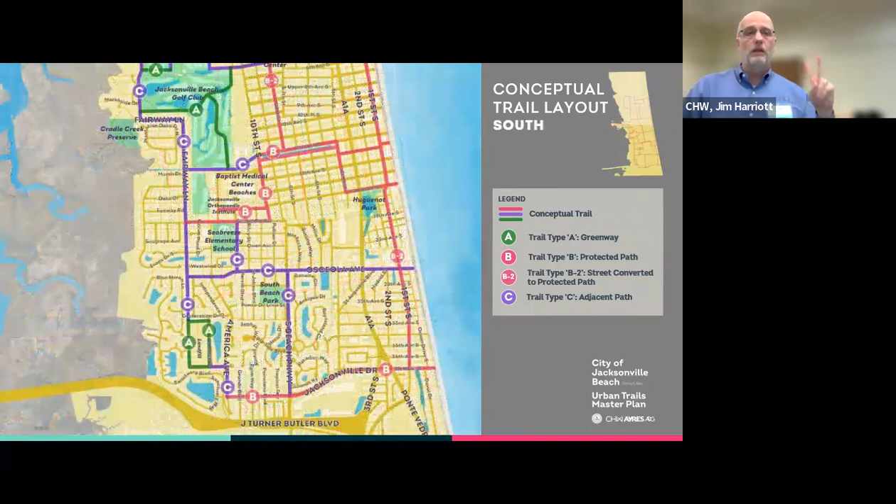So let me jump to the south map. You see the A's. The A-type route is a Greenway. This is one of the biggest challenges we see, true Greenway trails where you're completely void of vehicles is really difficult. There's a lot of roads and streets, and it wasn't planned for that. You don't have the benefit of two or three railroad corridors running through the middle of your city that you can acquire and convert.

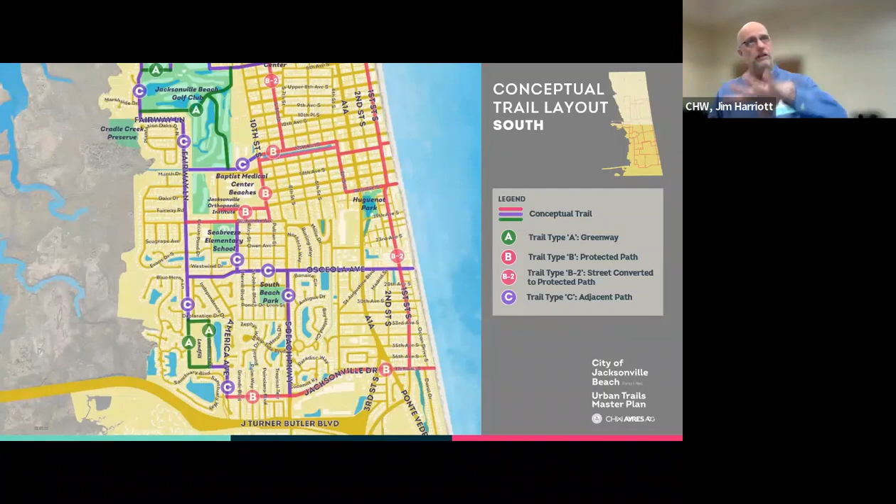But there are some areas that stand out. One is the golf course up here, and we've talked to the city, Parks and Rec, and the golf course people, and they are open to running trails through the golf course. So we've done a lot of background research on other communities that have done this. As a golfer, I was kind of surprised, because there are golf balls flying around golf courses, and there are communities that have dealt with it in different ways.

Some communities have just said, you know what, you're out there, you raise your hand and head out, we'll be gone in a few minutes. Other communities have put nets up. So we're kind of working on that. The concepts you see for routes through the golf course are in concept only right now. We've mapped out the holes, we've got a picture of that, and we'll start laying those out to see if there's any ability to move people in around the golf course.

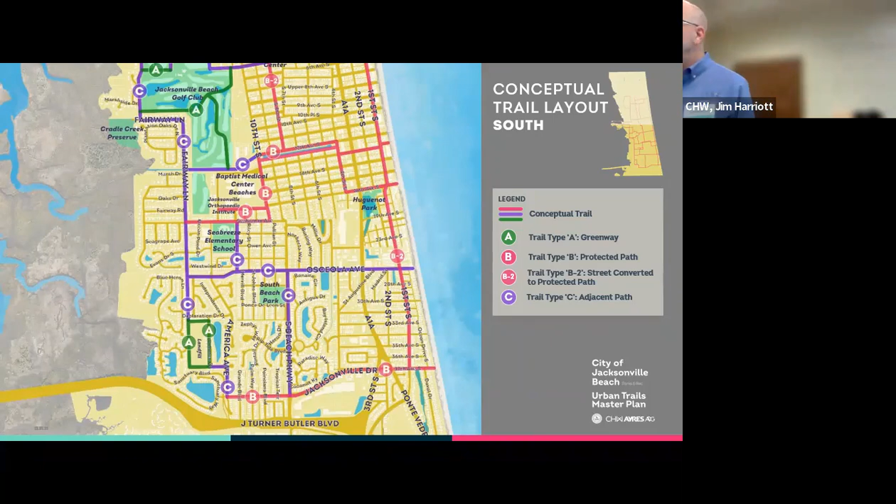The other area is at the south end of the city. This A and this loop here is an old landfill that sits out there. It has a Greenway route that could reach up into the north from the landfill up into the neighborhoods to connect those. It's kind of a unique area. I was out there again tonight taking a look at ways it could be connected. So those are two areas that stand out.

The B route is a separated corridor where you're separated from traffic, reasonably safe. The C routes, the corridors, are just a little bit tighter and you're closer to the travel lanes, but still separated. So let's go ahead and take a look at some of those.

These cross sections — the Greenway cross section here is the type of atmosphere you're trying to create in these two areas, separated. We think we can accomplish that on the areas on the map marked A: more nature exposure, a route that might be transportation related where you're using it to go somewhere, might provide access to neighborhoods, but definitely a safe riding environment. You'd be completely safe in whatever modes moving through the corridor. We've called it type A and defined it as a Greenway.

Type B routes are a protected path, where the goal is to move the path as far away from the right of way as possible. On the actual diagrams of the cross sections we drew up, it says 'varies' — I'd say you want to get 10 feet or more, and there are some rights-of-way in the city where we could accomplish that.

There are other trail types we're working on. Everyone's probably looking at the map and asking what we're going to do on First Avenue, because that's one that's banging around in our minds. We've come up with some cross sections—Cody's worked on some, and I've fiddled around with some—and it all keeps leading us back to needing to talk to the community and stakeholders more about how we can handle that. There's so much pedestrian activity and traffic around those areas. How do we create a safe environment? We have ideas that would be really cool, but they're big ideas we want to discuss with the stakeholders first.

For example, creating a one-way street on First, or eliminating traffic completely and going with a pedestrian-type street. I didn't put a pedestrian street cross section in here, but if you've ever been to Asheville, North Carolina, there's a little street called Wall Street—you can Google it, it's pretty cool. Lemon Avenue in Sarasota is another one. Basically, from storefront to storefront you have the same cross section elements: sidewalk, street, sidewalk, storefronts on either side. But where you'd have curb and gutter, you take that out and create trench drains so it's all one surface level, door to door. As long as you keep pedestrian and bicyclist activity up, you can still allow cars to go down there.

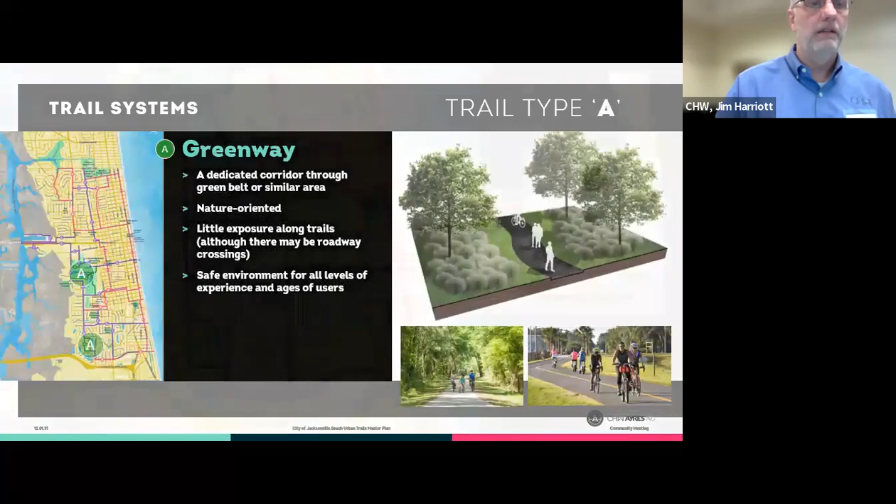On 10th in this area, we come down on the north map. We come down 10th all the way down to the bottom here, and then we jump over to 8th. And you probably wonder why - it's because of less driveway interaction.

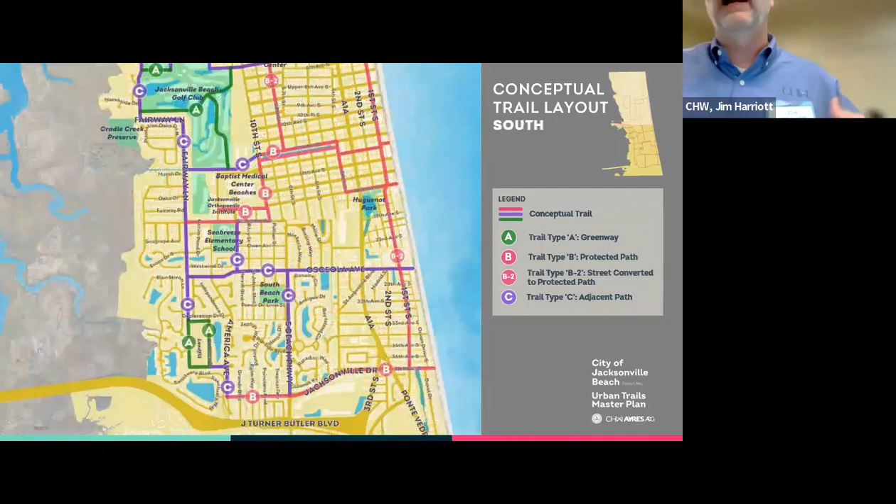If we stayed on 10th, it turns into an industrial area south of Beach Boulevard. There's a wide right of way, but there are driveways everywhere - people are parked everywhere. We just didn't think it was ever going to be a viable part of the network if it was something done early on in the project. So a lot of those answers as to how do you impact or cross driveways become site specific when we get out there, but we are looking at them from a planning standpoint.

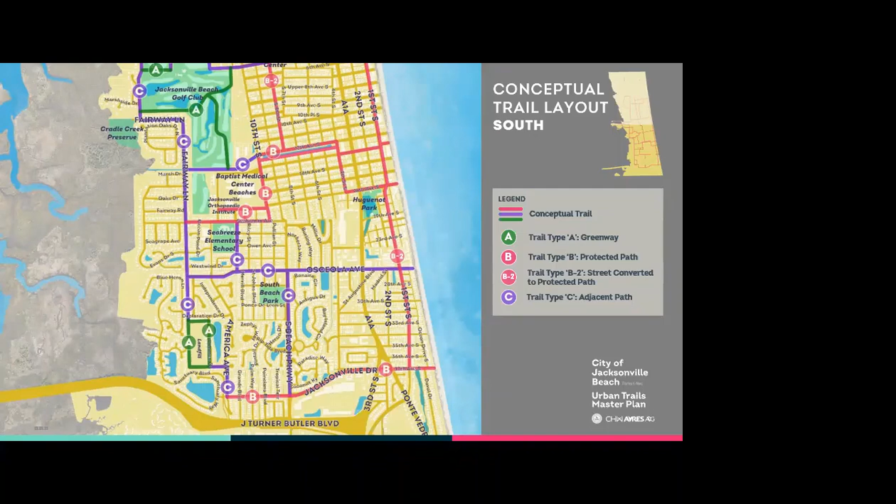Trail type Greenway - so Jacksonville Beach Golf Course, A, B, protected path, trail type B2, separated. Here's the pier, and it goes through here to Penman. Trail type C, adjacent path. Well, this is coming right down to us.

Protected path. Right here? Adjacent.

So for those on the Zoom meeting, there were two question points. One was the very south end of Penman - is that correct? As it approaches Beach, is to close that gap and find a way across Beach Boulevard. And then as an alternative to running along Beach Boulevard, which is probably a very tight right of way, look at Shetter as a corridor, correct?

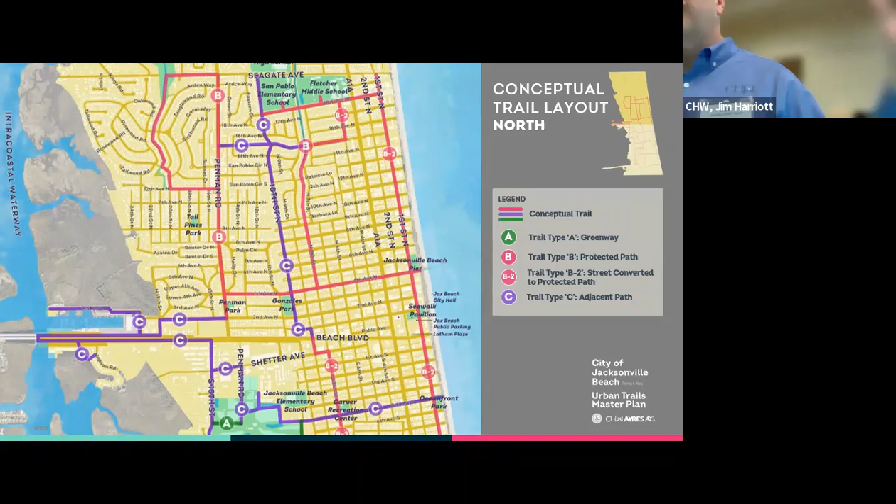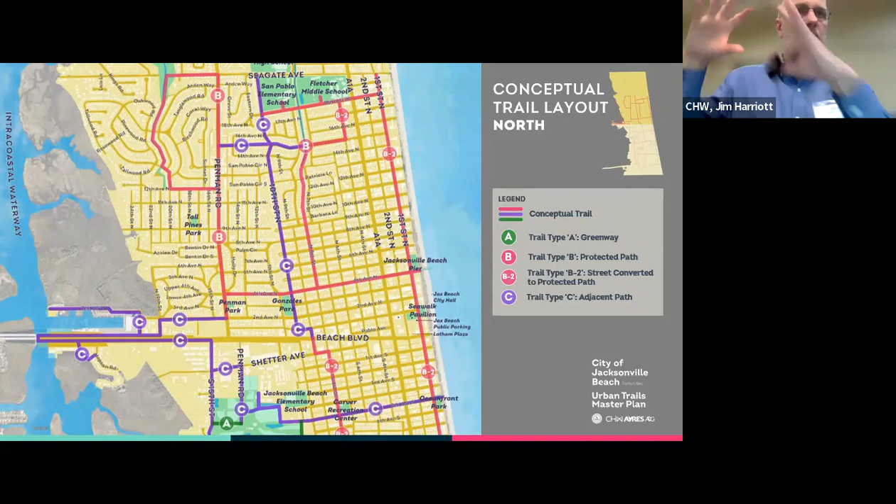Does everyone understand what a hawk signal is? Hawk stands for something, and I'm not going to try and explain that - it's basically a pedestrian-only crossing with overhead signals, much like a traffic signal. The signals are up overhead, not on the side of the road. They're signed a certain way and have signal indicators in a certain way. So somebody comes up, activates it, waits, the signal changes, stops traffic, and then the bike lane or crosswalk works with the traffic stop. So it's a high intensity crossing at A1A, and there are some things we'll look into to even enhance the safety of it.

And we'll make sure that they're aware of that, or you're aware of that, and take a look at it. I haven't seen a hawk signal in Jacksonville Beach - I wouldn't say it's fairly new technology, it's long-term technology, but the application of that technology is fairly new in FDOT circles. I can't think of where I've seen one, but yes.

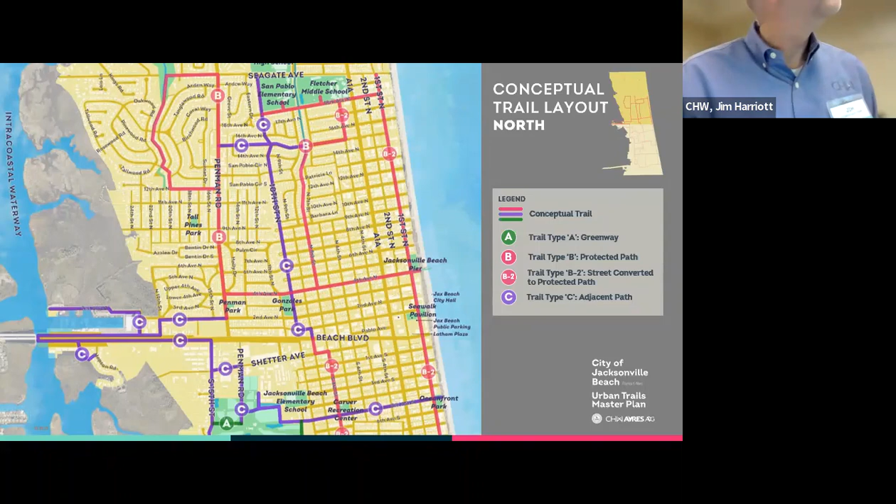I have two questions. One is on Penman Road - there's going to be a road work project on that road, and I'm wondering if there's any particular constraint on Penman that prevents that from being an A type trail? So the question is, on Penman, is there anything that restricts it from being an A-type trail? It's got the road in the right of way - I'm not sure you could ever get the trail far enough away from the edge of pavement to be what you would refer to as a greenway.

A greenway is where there's nothing around you - you're in the corridor, in the trees, in the nature element, riding on a trail. That's how we've defined greenway. It could definitely be a protected, B category trail, and then you try and push it as far away from the edge of pavement as possible.

My second question is whether, if you're a B2 or C, is it safe to say that the minimum for all three lanes is at least 8 to 12 feet of pavement, separated by 4 feet at minimum from path to road - all three of those? So to restate the question: for A, B, B2, and C, would the path be 8 to 12 feet and separated by at least a certain distance?

Generally, yes. But with the built right-of-way the way it is, there might be areas where that path comes closer than 4 feet from the edge of pavement. But I think the goal always is at least 8 feet, targeting for 10 to 12.

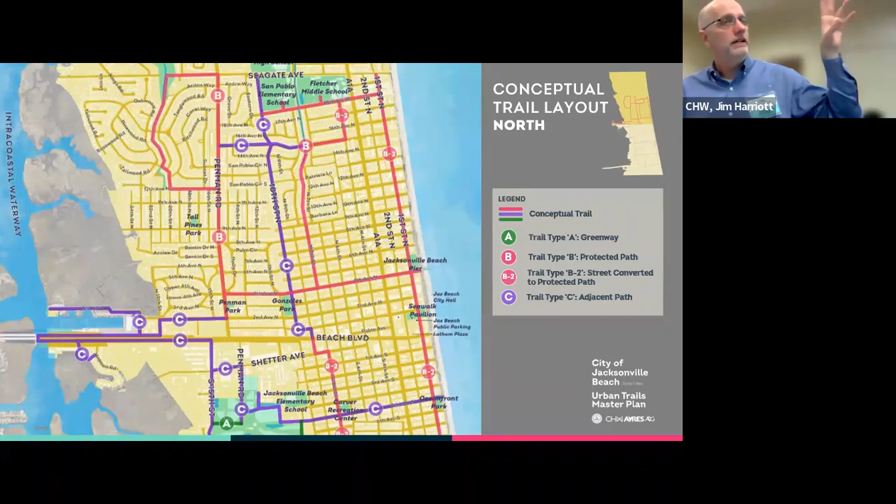We've looked at the East Coast Greenway, and there are specific requirements. It really kind of surprised me that they want a separated, dedicated corridor, and it's very specific. So bike lanes and bikes in the street basically are not part of the corridor — it won't get designated as part of the East Coast Greenway if that's what it is.

I'll have to look at how they did that, so it can become part of the designation. We'll talk to Jason about that, we'll talk to the city about that. It's that separated, dedicated trail that matters. I couldn't find where they had a design element saying you must be separated by 4 feet, or 10 feet, or 15 feet, so we'll look into that. But basically your question, answered yes.

Grant application went today, correct? Yeah, so I think that was one of the projects that was finalized, one of the ones we laid out. So yes, the question was, have we looked at Brownfields funding for the old landfill, and the answer is yes — an application has been made.

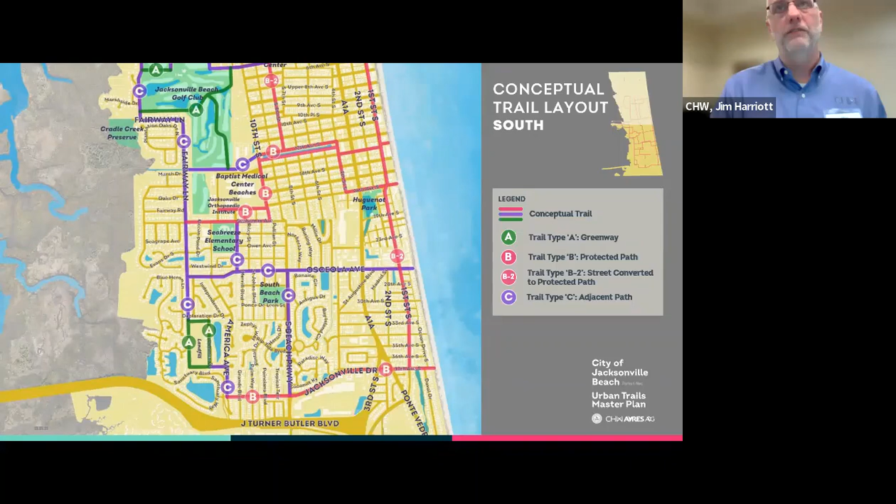So the question for those online was, how do you accommodate two-way bike traffic in a roadway that's one way? There are many examples of that, and it's a traffic engineering problem that you have to solve. It can be done and is done. It usually involves some form of separation in how you line up the lanes and make sure the contraflow bicycle is on the right or proper side of the travel lanes. Mount Dora had that example.

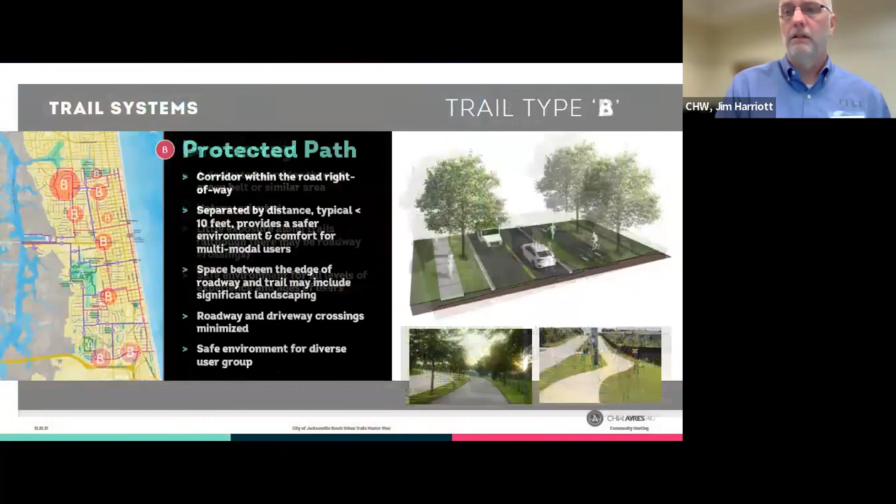So that bottom right picture is what you're basically describing. This one down here is one-way traffic, and this is a two-way bike path—basically a bike-ped multi-use path. They use it for walking too. You see a bicyclist on it there, but in Mount Dora you'll see people out walking on that corridor also. So it's really that separation, and then the signage that goes with it, and then how you handle the intersections. Those are all design elements we would have to work through.

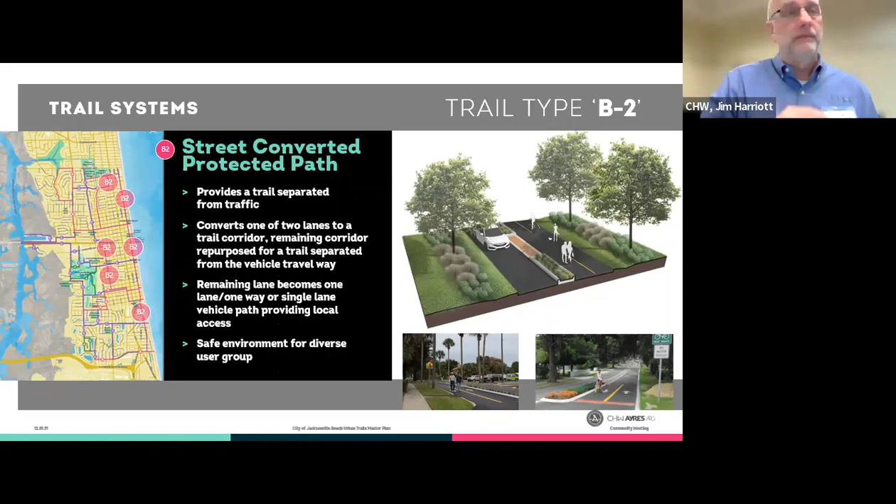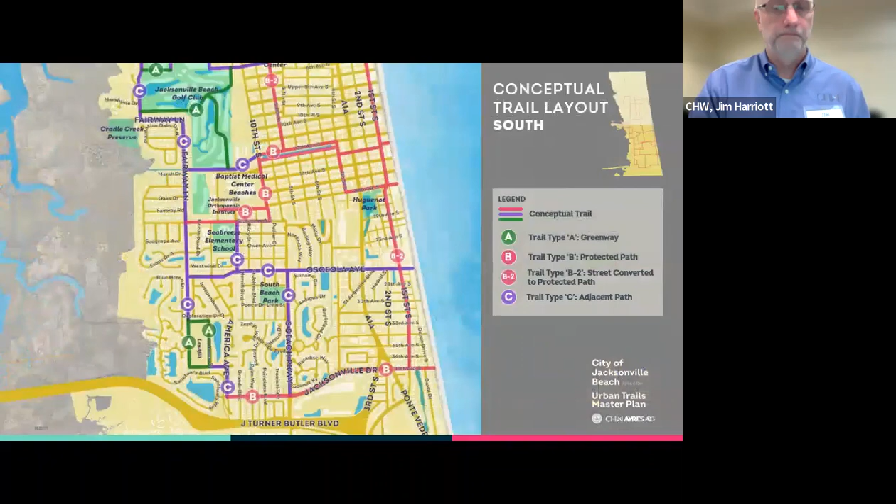Just a general question—your introduction was really good, but it was about separating pedestrians and bicycles from motorized vehicles. My question is, we already have state statutes with rules about pedestrian traffic and bicycles on sidewalks. By naming these trails and paths, how would those statutes be appropriately applied, or would new rules have to be written locally? So the question is about state laws regarding bicycles on sidewalks, whether they're permitted or not, and how that law would apply to the trails.

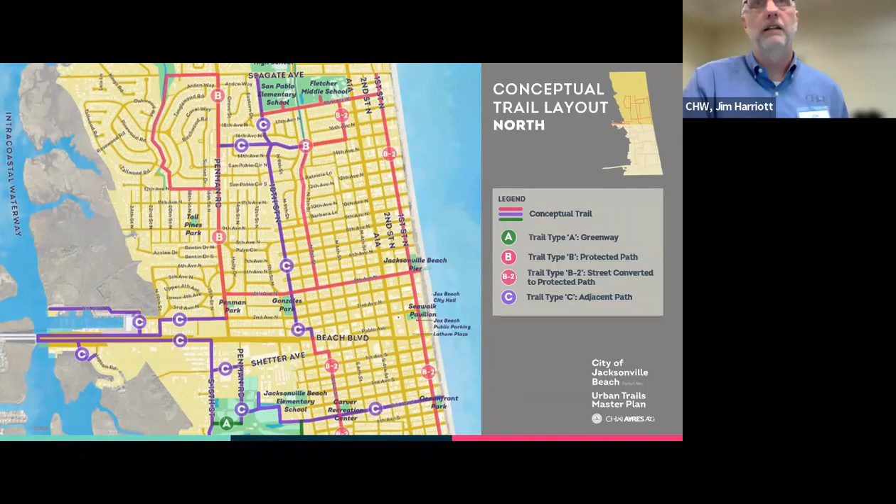The answer is the trails are something different. There's always in the past been sidewalks and roads. The trails kind of fit in between that, and you have to sign them right, approach them right, and get them to the streets right. That's allowed, that's okay. The state rules against bicycles on sidewalks are kind of nuanced in a different way.

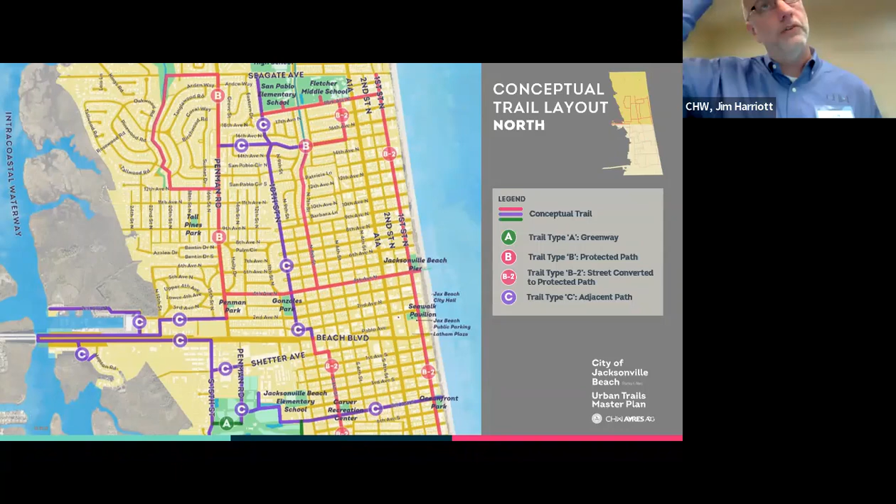You're allowed to ride a bicycle on a sidewalk, but the caveat, in very basic form, is if you're riding on a sidewalk, you have to act like a pedestrian. So when you come to a cross street, you have to do what a pedestrian would do—stop with the traffic, move with the ped light, or move with the flow of traffic. If you're in the bike lane as a bicyclist, now you're a vehicle and you have to act like a vehicle. It's an interesting nuance, but the idea is to build the trail system and design it so it's comfortable and usable in a safe environment for all those users.

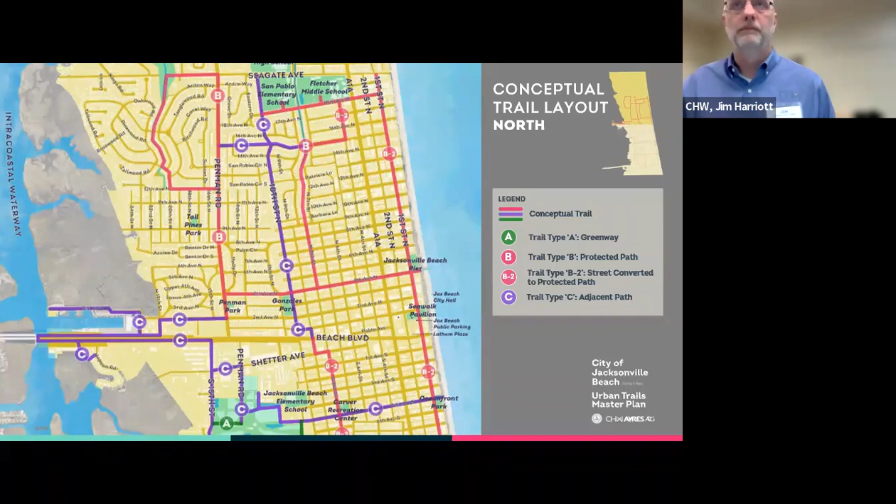Like I said, a speed limit many times is one. Now, I don't know if anybody's ever gotten a ticket for riding too fast on a trail, but it tends to push cyclists off the trails and onto the streets. Cyclists are the people who strap their toes into the pedals and take off—they don't want to stop, they just want to ride fast, fast for a bike anyway. So we would look at those on a specific basis, in a specific location, and at every intersection you come to, you have to analyze that and make sure it's a logical approach with notification to both the cars and the trail users. There could be different answers all the way down the trail, but it uses the same logic that motor vehicles and pedestrians use today, so it shouldn't be foreign to anybody.

MUTCD, Florida Green Book.

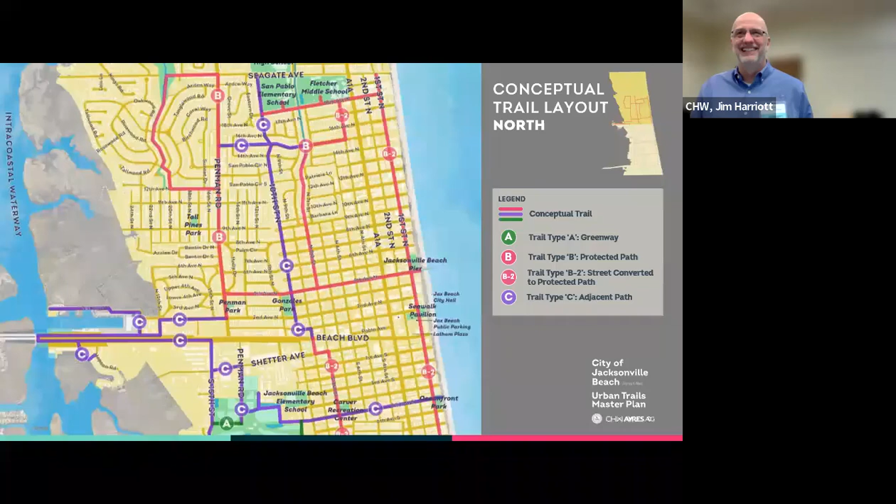There's some common courtesies that you start to learn. 'Coming up on your left' is a good phrase. If you're coming up behind a person and moving faster than a walker, as a trail user, that's a common phrase you get to know and use. It works.

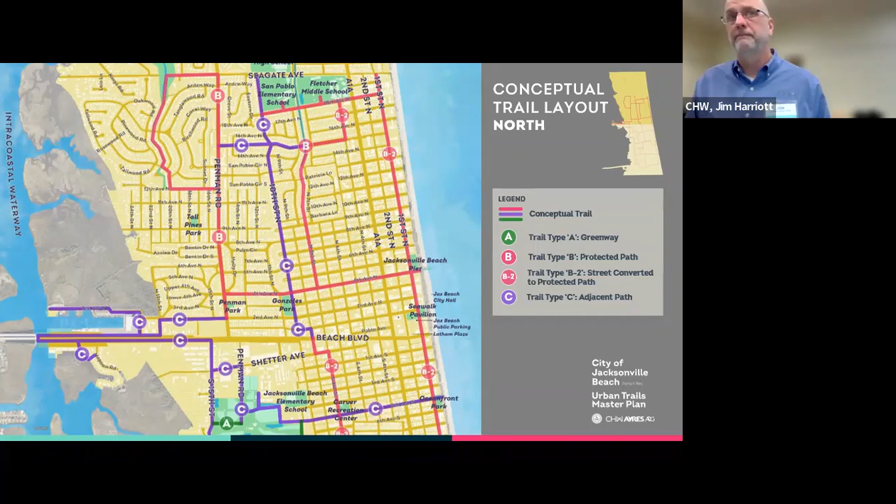Any other questions? Do you have handouts, is it available online? We can, somebody help me on that.

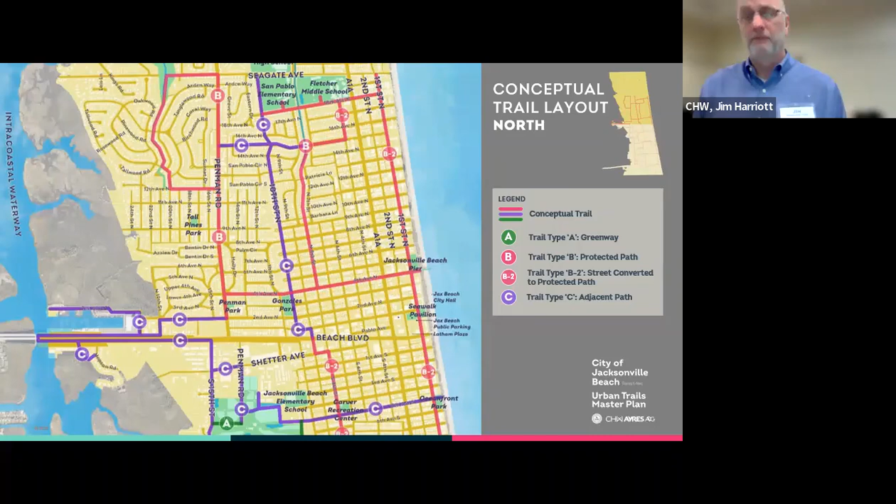We've recorded the presentation that will be posted. Keep an eye on the city's website, but we will post the presentation, both the recording and the slides, so that you guys can take a look at these.

We'll also be sending out a survey with some general questions. One of the big parts of this project is branding and wayfinding and how that works. Our graphics people will be asking some questions about how you see getting around the trail system and what signage and such. We'll also ask some design element questions about the network and maybe some follow-up questions on what came up in this meeting.

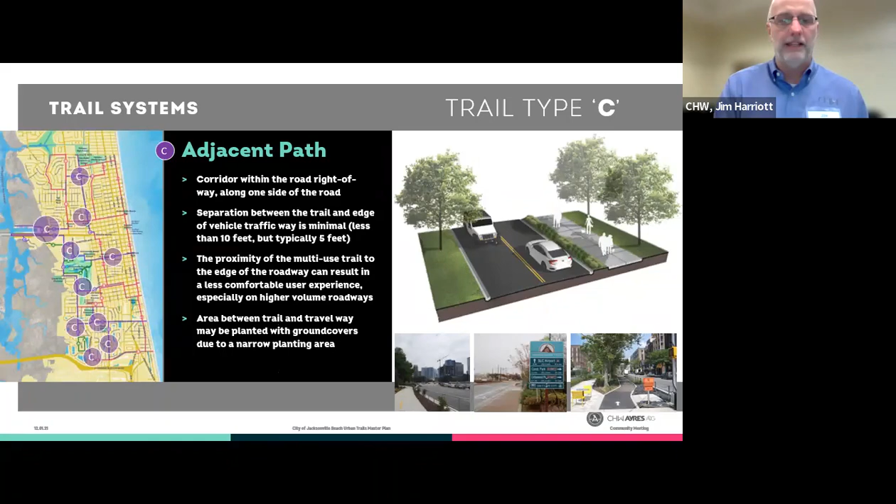It's getting a little noisy in the room, so we've concluded the presentation. Speaking to those online, it's getting noisy to where now there's nobody sitting in front of me. If there's any other questions, text them into Seth or message them into Seth. If not, our contact information was on the slide, connected through the email. If you send it to that email on the last slide, it does come to my email box.

So Jax Beach, utmp@chw-inc.com, that comes to my box. I get copied on those, and we will be sure to incorporate your comments and questions and answer those for you. One of the things we're also going to do is list all those questions and comments and provide them to the city, as well as how we addressed or resolved them in the plan. I think we're good to go.